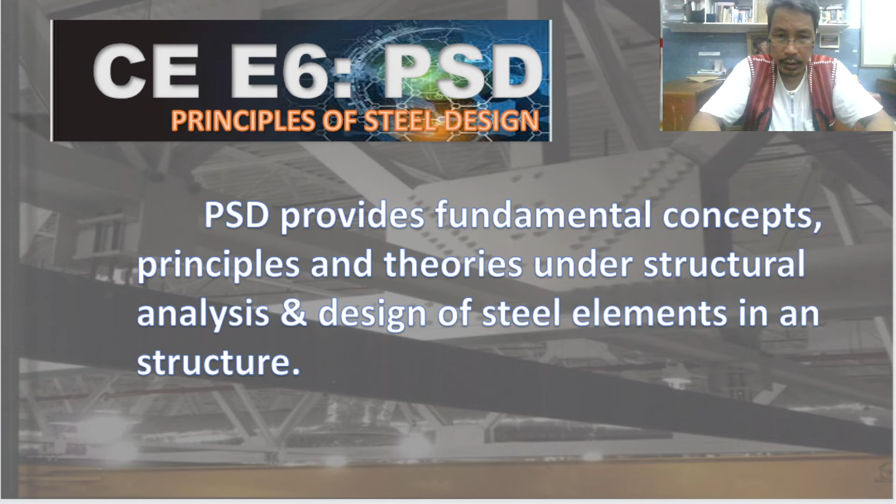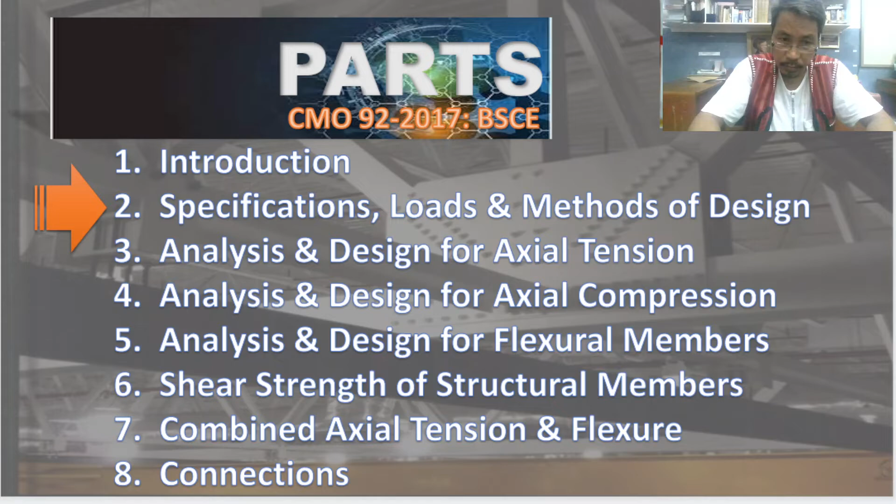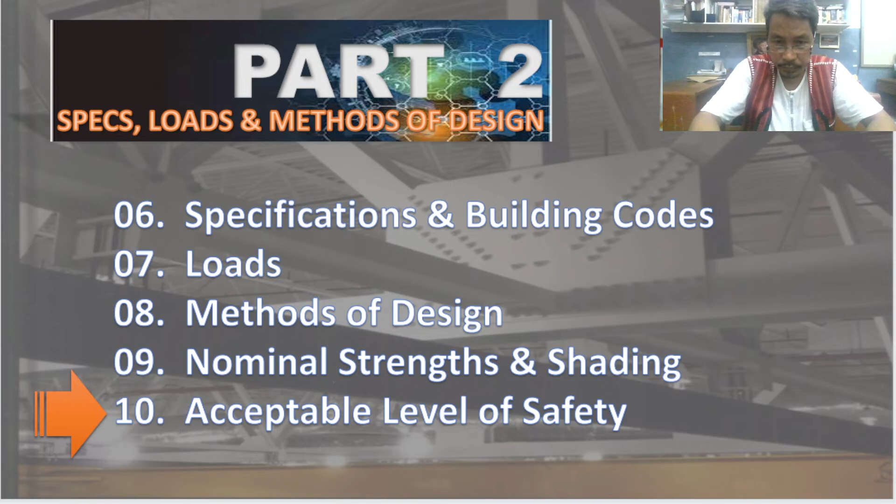We have the list of the topics to be covered. We are on major topic number 2. Under this, we are now on the last module of this major topic number 2, about acceptable level of safety. So, what do you mean? What do we need to understand?

So, the margin established between resistance and load in real cases is intended to reduce the probability of failure, depending on the consequences of failure or unserviceability. Okay, so let's go further. So that's the main idea. The goal of this is actually to reduce the probability of failure.

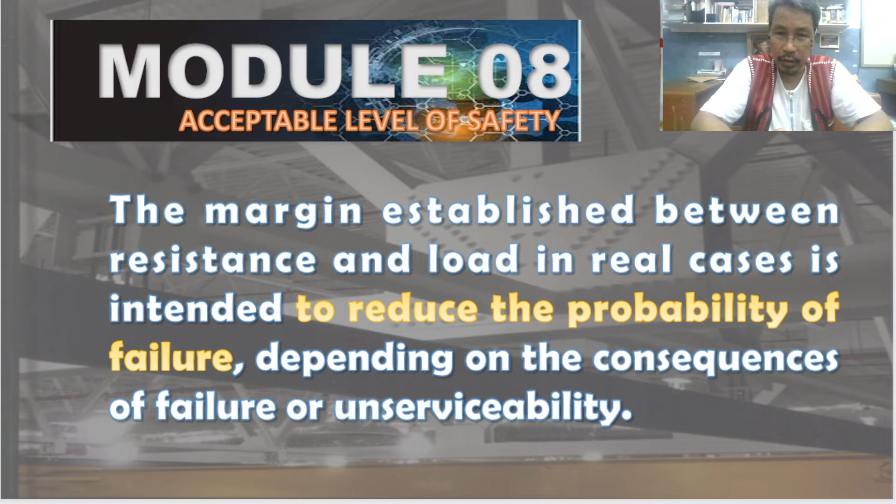And how to achieve this goal when there is usually insufficient information, not only insufficient information, insufficient knowledge, insufficient scientific knowledge? There are tons and tons of studies about steel, but we cannot say that our current knowledge is complete. For example, information for a completely mathematical description of either load or resistance is not yet available. But we want those to be studied, researched, and applied.

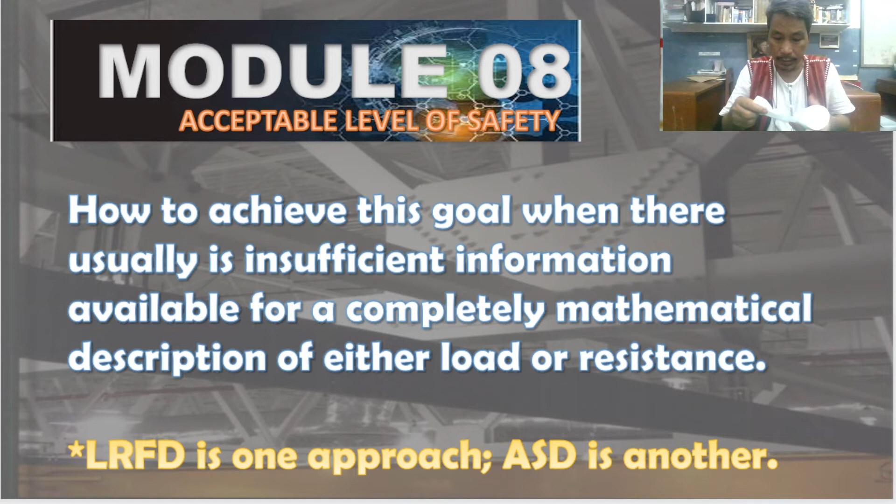So LRFD is one approach to solve this, and ASD is another. Meaning to say, even up to now, we cannot solve this type of design problem by rigid or pure scientific means. It is still scientific, but not closed mathematical analysis and description. So we have empirical formulas, scientific observation rather than mathematical formulation and description.

However, LRFD and ASD both have as their goal to obtain a numerical margin between resistance and load that will result in an acceptably small probability of unacceptable structural response. So what are examples of unacceptable structural response? Failure due to buckling, failure due to deflection. Those are unacceptable structural responses. There are about 10 specified in the code and in our reference book.

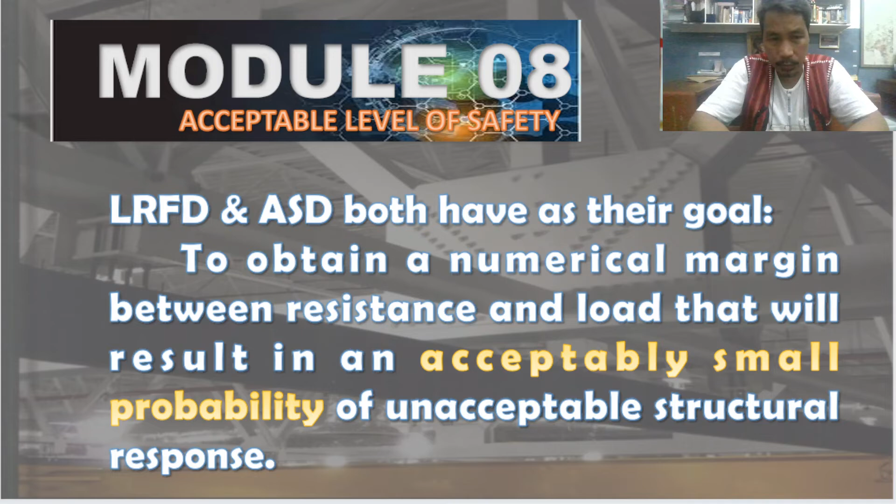So, major differences between LRFD and ASD. The number one difference is, of course, the method used for calculating the design loads. There are 7 load combination equations for LRFD and 8 load combination equations for ASD. The number 2 difference is the use of resistance factors. In LRFD we use phi, and in ASD we use the safety factor omega. So again, LRFD uses resistance factors, ASD uses safety factors.

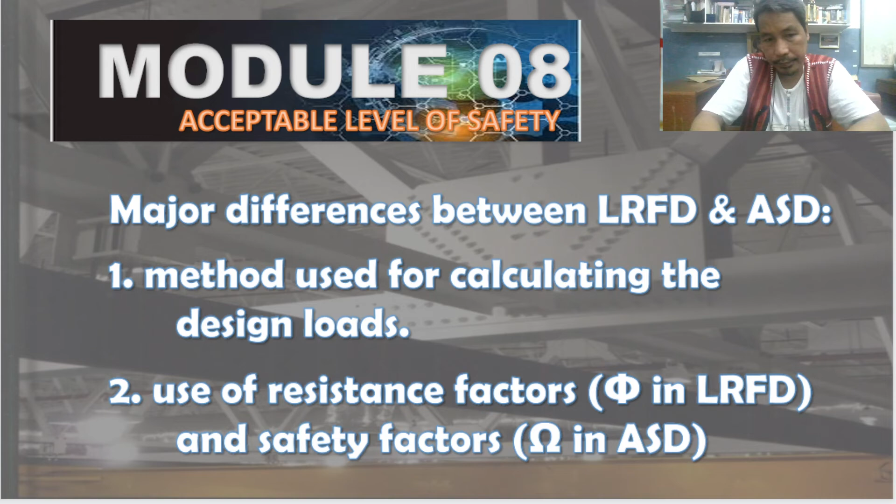So, structural safety. We have a basic equation for design to conceptually formulate and numerically calculate the values. The required strength must be less than or equal to the available strength of the element. The required strength is determined through an analysis, also called load effect. It comes from the loading. So we assume load: what is the total amount of load we can think of? Then we can compute the required strength. So it is on the load side.

What about the available strength? It is determined through specification. Specification meaning these are properties and characteristics, already tabulated. That's why they can be specified. And they are based on limit states, also called resistance, the resistance of the material. It means the characteristics of the material, the size and the dimension of the material. Those are the things involved that affect the resistance of the element.

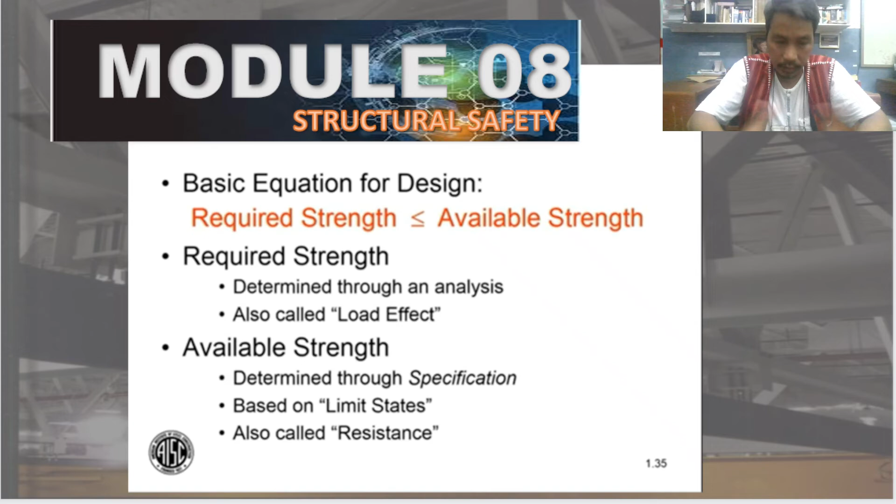So in general, if we are talking of load effect and resistance, the load effect is coming from the load, and resistance is the capacity of the material. So the load effect, the load, must be less than or equal to the capacity of the material, or the resistance. Okay.

So in mathematics, the summation of gamma i times Qi. Okay. Qi is the load, the different types of loads. Gamma i are the corresponding load factors. Okay. And we have to sum up all of them together from i equal to 1 to n,

and that summation should be equal to or less than the nominal strength multiplied by the resistance factor. Sorry about that. So therefore, nominal strength times resistance factor is actually what we call the resistance of the material.

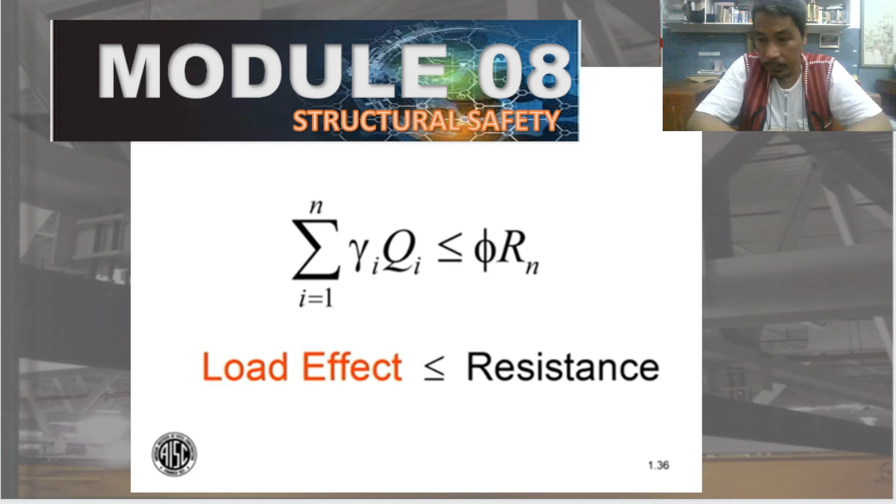So the left side of the equation is what we call the required strength. That is the requirement due to the load. Okay, and the right side is the available strength. Okay, so going further, what are the design basis? Important definition. For example, let us use required strength R. For ASD, we are using Ra.

So, Ra is the required strength for ASD and Ru is the required strength for LRFD. So any R is the required strength. It could be what? Concentrated load, it could be uniform load, it could be torsion, it could be flexural. Okay, so those are the possible representations for the R. Okay, what is our required? It is tension, it is compression.

Next, nominal strength, Rn. Okay, so nominal strength is a theoretical strength that we need so that we can multiply by phi to be able to get the available strength. So what is available strength? Rc is allowable strength. Okay, so available strength is the allowable strength. That is also equal to nominal strength divided by omega, because omega is a safety factor and that is supposed to be greater than 1.

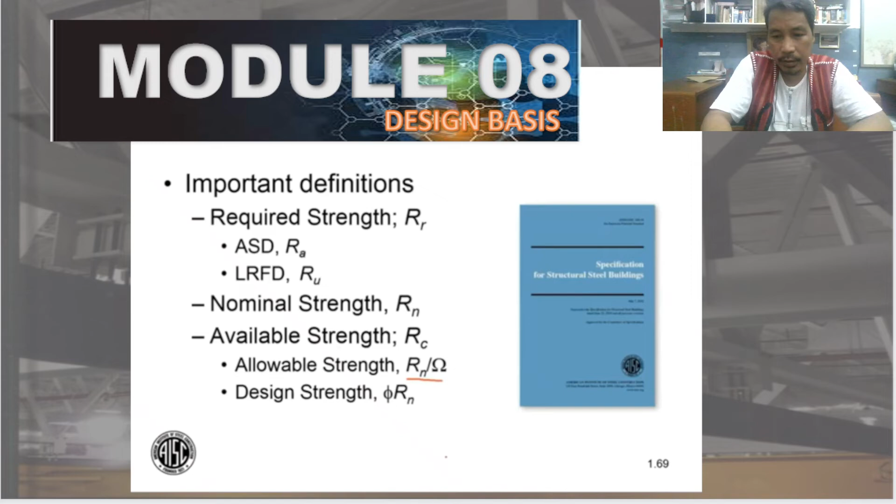Something like that. So writing it down to be our design basis for LRFD: design shall be performed in accordance with this mathematical formula. Just like what I've said, Ru is equal to or less than phi Rn. Ru is required strength, Rn is nominal strength, phi is resistance factor. Okay. And phi Rn is equal to design strength, resistance factor times nominal strength.

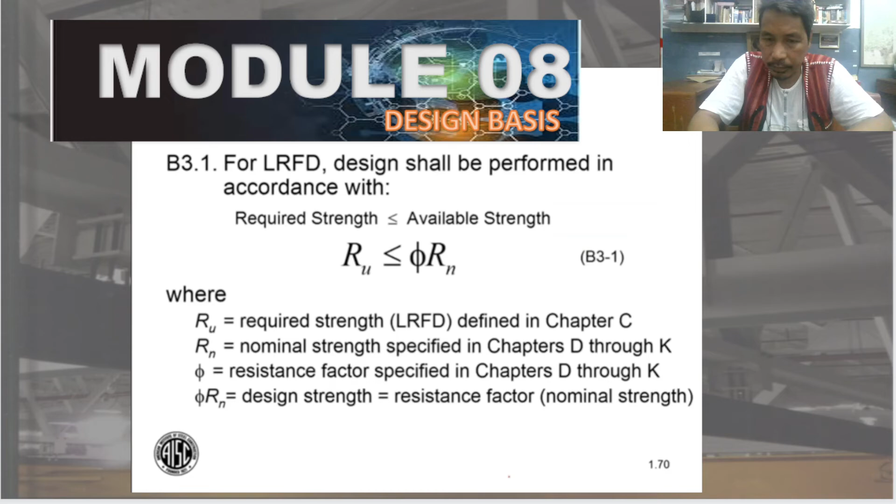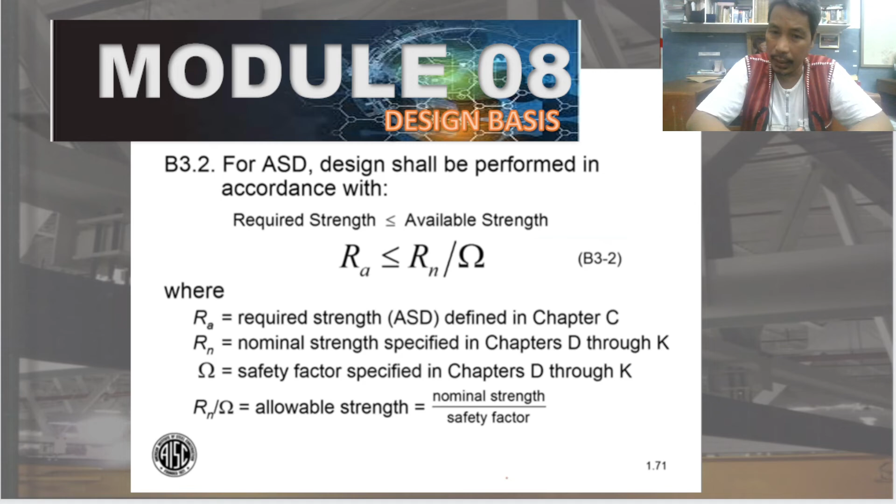What about for ASD? Just like what I've said, Ra is equal to or less than Rn over omega, wherein Ra is required strength, and omega is the safety factor specified in chapters D through K. So, nominal strength divided by omega is what we call allowable strength. Okay. So, continue with the design basis for both LRFD and ASD.

If we have a concentrated load, Pn is equal to Fy multiplied by Ag. Fy is the yield strength of the material, and Ag is the gross area of the material. So, multiplying those, we have the nominal load. So, phi for tensile: when we are talking about tensile strength, we will use the yield. So, phi is specifically equal to 0.9. Talking about tensile, again, 0.9.

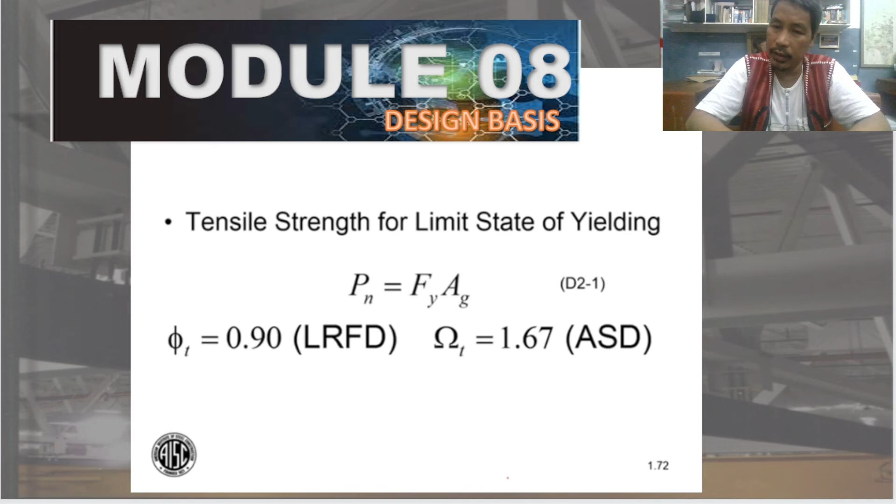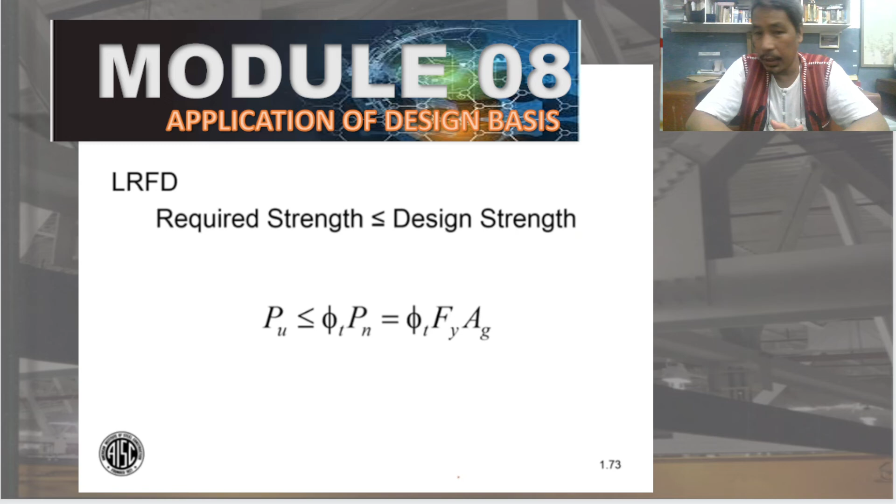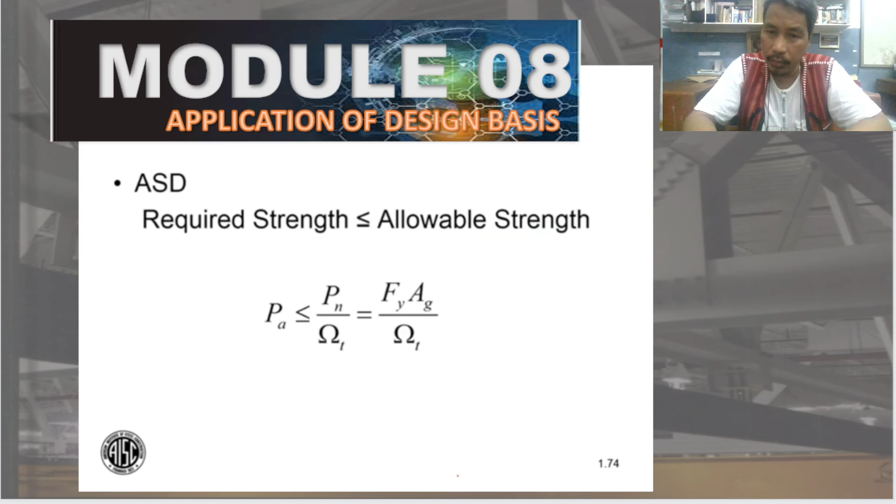What about the safety factor? Omega is equal to 1.67. That is for tensile alone. So, we can use this because we have the LRFD. If we are talking of concentrated load, Pu must be equal to or less than phi tension times P nominal. So, for ASD, we have this equation. We are using Pa, meaning the required strength in ASD.

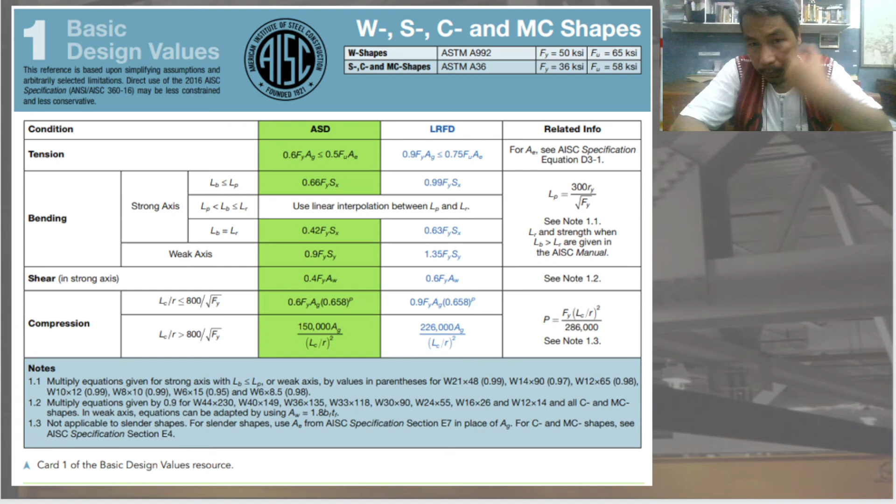Okay. So with that, we can see that there are columns for ASD and LRFD, and the remarks, explanation, information corresponding to them. Okay, so for example, here if we are going to use these basic design values, this reference is based upon simplifying assumptions and arbitrarily selected limitations. Direct use of 2016 AISC specification may be less constrained and less conservative.

So we have W, S, C, and MC shapes. So for W shape, ASTM A992, meaning Fy is equal to 50 ksi, Fu is equal to 65 ksi. So for S shape, C channel, and MC shape, we have ASTM A36, meaning Fy is 36, Fu 58. So for condition of tension forces, we have ASD 0.6 Fy Ag is equal to or less than 0.5 Fu Ae. So Ae is the effective area, while Ag is again gross area.

So 0.5 is the factor, Fu is the what? Ultimate, Fy is the yield. So for LRFD, the corresponding formula is 0.9, that is the resistance factor, 0.9 times Fy Ag must be equal to or less than 0.75 Fu Ae. Okay, so that is for tension. Okay, so you can compare it when we are going to use compression.